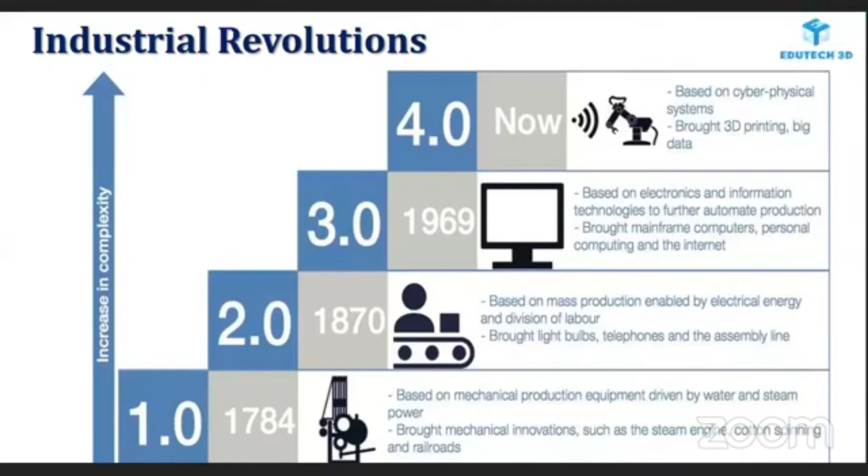The computer had been invented, and currently we are in the fourth industrial revolution. It is basically the combination of earlier inventions. The internet has lessened the distance between manufacturing systems. Robotics has been invented, the Internet of Things has been invented, along with big data analysis, augmented reality, virtual reality, and 3D printing. This kind of cyber physical system has grown up, and we are now entering the fourth industrial revolution, known as Industry Revolution 4.0.

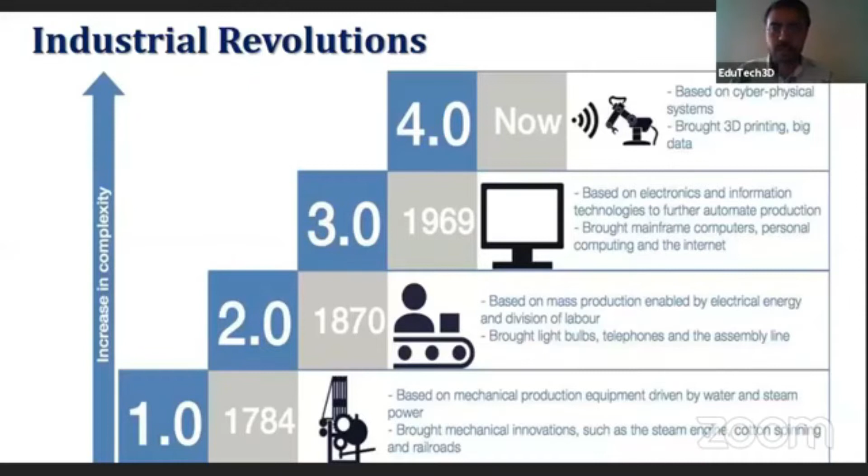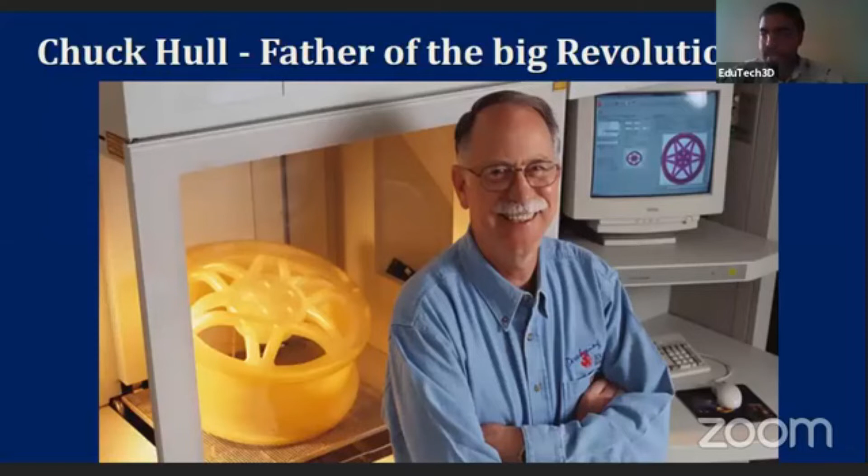Let me give you a brief introduction about what this technology is. The 3D printing process is actually a layer by layer process. You make a layer with the help of a 3D printer, and on the first layer, another layer is made. In this manner, as a mason builds a house or structure, there are 6 phases of 3D printing, starting from the 3D CAD model to the entire 3D printed object. First and foremost, we need a kind of software into which we can make our CAD model. After making that CAD model, it has to be converted into a particular file format, known as .stl file, also known as stereolithography or 3D printing file.

After making that file, your 3D printer is not able to understand what data is contained in that .stl file. So it has to be converted into a machine readable format, and what we are using to run the CNC machine is the G code file. So that .stl file needs to be converted into G code file. For that we require a kind of software which is known as slicing software.

We have discussed two softwares. First is the modeling software, another is the slicing software. Both are available as freeware, or you can purchase them. There are so many kinds of easy softwares available right now which you can use to learn 3D printing.

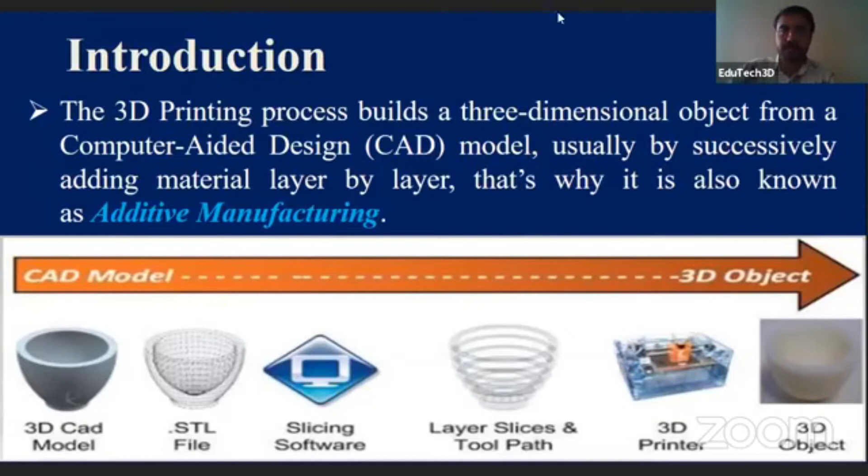After considering hardware, you have to acquire software knowledge for running a 3D printer, for modeling a certain kind of 3D model, and for converting that 3D model into machine readable format, that is G code. For this entire process, you have to consider many kinds of software. So software makes up a very good proportion of the 3D printing ecosystem.

Next comes the material. Until now, we have developed more than 100 materials of different types. For example, thermoplastics, polymers, composites, metals, alloys, rubber, elastomers. So many kinds of materials are available which can be dealt with by certain kinds of 3D printers. So we have enough material in today's era to deal with 3D printing, and new materials are being introduced day by day as material science progresses.

The fourth pillar of the 3D printing ecosystem is service providers, combining the three earlier stages - those dealing with hardware, software, and material - and they provide services related to hardware, software, material sizing, procurement of material, procurement of hardware, and development of software. All these kinds of services are provided by service providers, and they take 3D printing to the end user of the community. You can say 3D printing educationalists and 3D printing teachers are there, providing services into the 3D printing ecosystem.

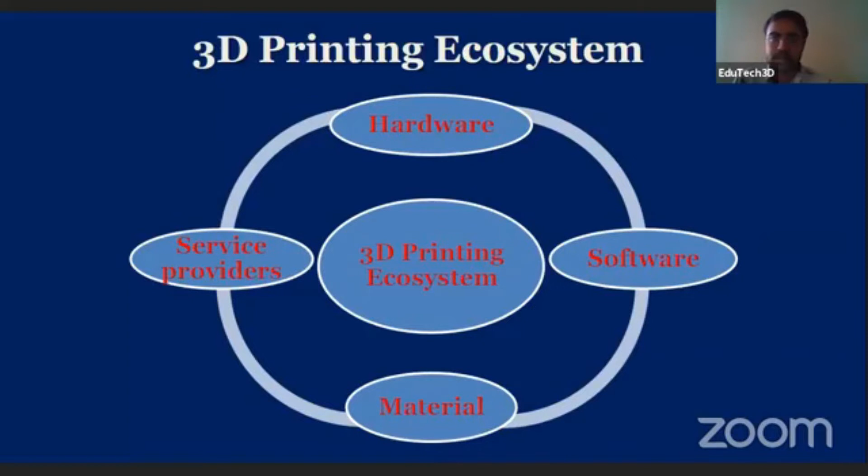Now, going into the kinds of 3D printing, or additive manufacturing technologies, there are majorly 5 types of technologies available till now, starting from vat photopolymerization, which is the earliest technology ever developed. Charles Hull even developed this technology. In vat photopolymerization, you can consider stereolithography apparatus.

Digital light processing is also there, which uses resin material and a kind of photocurable light, meaning you can use UV light, UV laser also there for curing the photopolymer material. We'll be going into the next slide in more depth.

The second process is material extrusion process, also known as fused filament fabrication, or more generally known as fused deposition modeling. But fused deposition modeling is a trademark term used by Stratasys, so in general you cannot use the fused deposition modeling name. Instead, you would consider fused filament fabrication. It's a kind of material extrusion process, meaning you are extruding material with the help of an extruder motor from the nozzle, from the hot end, and you are melting the plastic material. The material is thermoplastic - according to temperature it melts and starts flowing out of the nozzle, and it will deposit on the platform bed, generating shape according to the provided geometry. So that is material extrusion.

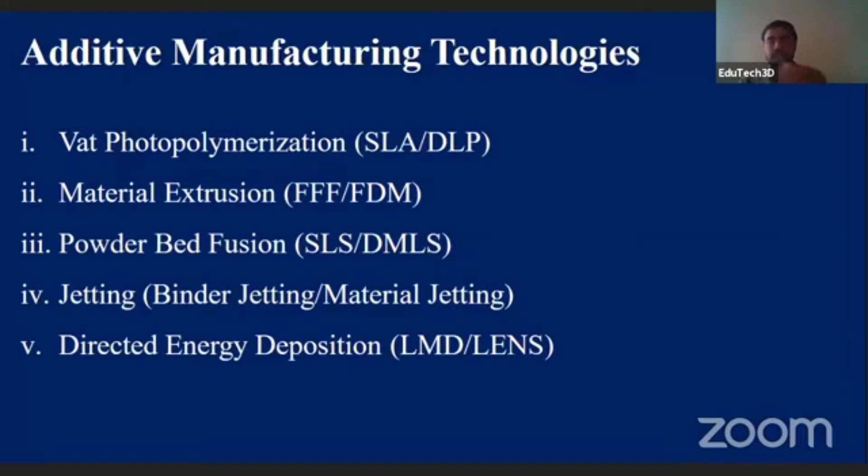The fourth process is known as jetting process, specifically binder jetting and material jetting. We'll go through the difference between binder jetting and material jetting later on. The fifth one is the directed energy deposition process, also known as laser metal deposition or laser engineered net shaping process, in which we have a coaxial nozzle for the material and the laser. One nozzle imparts the laser, and another nozzle provides the metal powder. The laser melts the metal and it starts depositing on the platform, generating the shape into the third dimension by similar means.

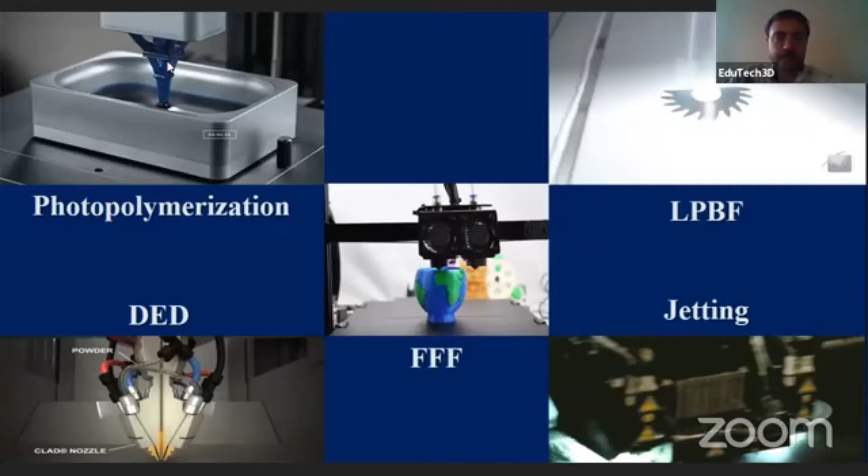Here I have shown images of various processes, starting from photopolymerization. This is a resin pool into which a photocurable resin is filled. Resins are of two types: either castable resin or non-castable resin. Your resin fuses with the help of photons, meaning UV light or UV laser. At the place where your geometry is provided, you impart the laser on the resin, and at that point the resin gets fused and starts making the shape. The platform is upside down, so in this technology you get the shape in an upside-down manner from base to top. After producing the whole object, you opt out the material, and after post-curing, the object is ready.

When to procure this kind of 3D printing system? When you require a certain kind of geometry and surface complexity, then you can opt for this kind of technology. It will give you a tremendous amount of accuracy in shape.

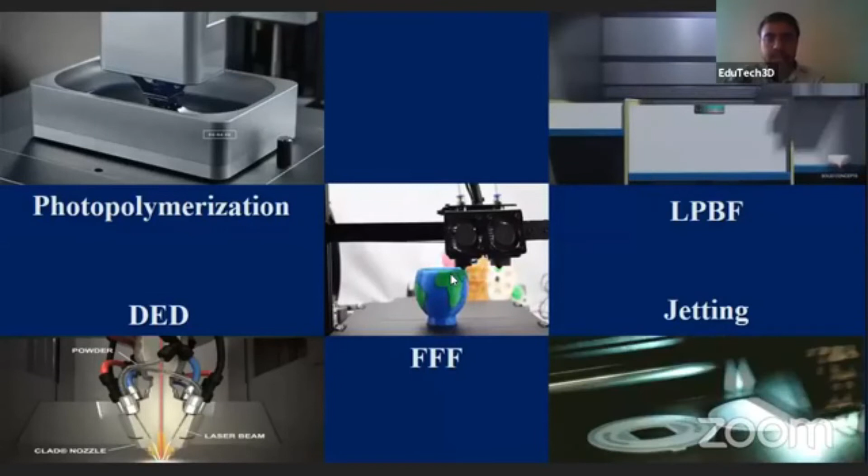Another kind of technology is fused filament fabrication, or FDM, which is a material extrusion technology. You extrude the material from the extruder, where a hot end is provided. The hot end melts the material, and it comes out of the nozzle and is imparted on the platform bed, as here a small scale replica of earth has been made. As per your geometry, you impinge the material on the platform and it gets fused there, using plastic or thermoplastic material.

The third process here is laser powder bed fusion technique, in which we use laser power to sinter or melt material. There are two processes: some machines are able to sinter only, and some are able to melt the entire material. If we are dealing with plastic or polymer, you are not going to melt that polymer powder; instead you only have to sinter it, and it gets fused with some kind of binding mechanism, generating your material.

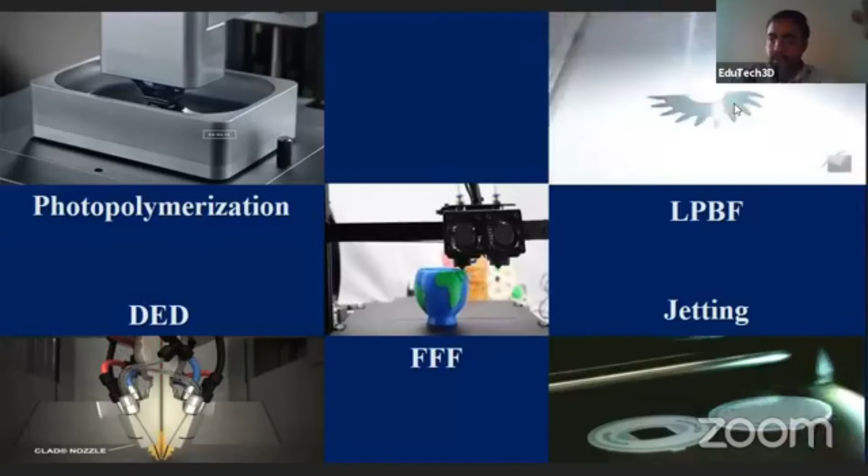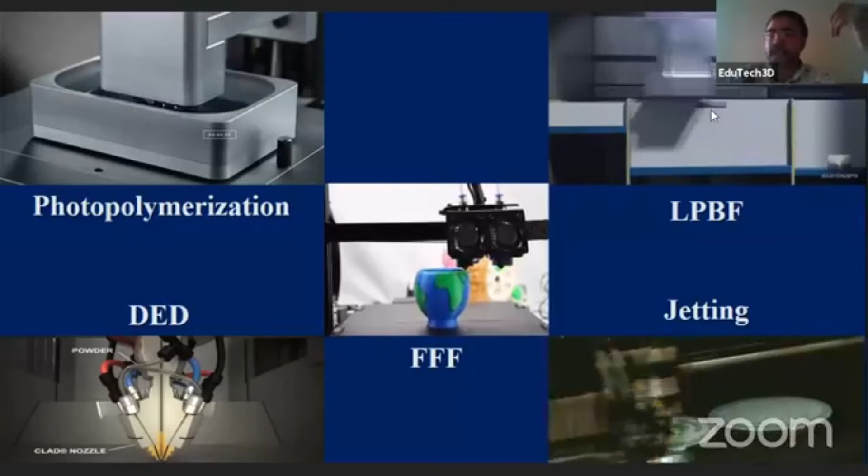If you are using metal powder, then in DMLS you are sintering the metal powder, not melting it. But if you are using selective laser melting, then for metal particles you need more laser power, a more efficient, higher voltage laser, which melts the metal powder and fuses it with other particles. Certain kinds of alloys are also used in this laser powder bed technology.

Next comes the jetting technology, into which there are two processes: binder jetting and material jetting. It is similar to inkjet printing. In binder jetting, we have a powder bed similar to laser powder bed fusion technology.

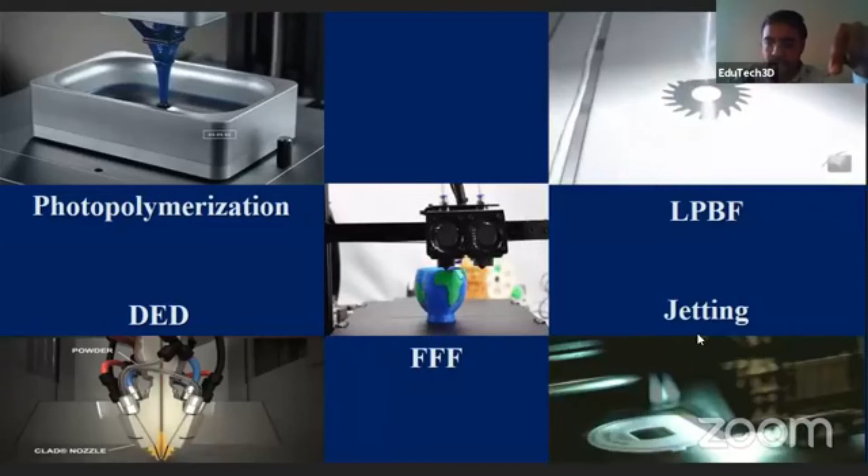In material jetting, this is similar to the stereolithography process. There will be a number of tiny nozzles that impinge the droplet, as is done in a 2D inkjet printer. In a 2D inkjet printer, we provide ink powder. Instead, here in the jetting process, we provide metal powder or polymer powder, and it will be impinged over the build platform. A laser or UV light on the printhead will cure the material deposited over the bed, and it will start getting fused over there, generating the shape.

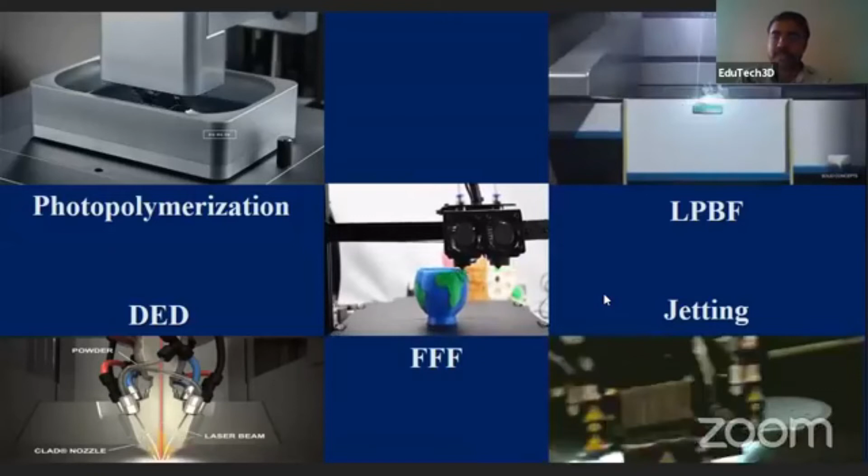Certain kinds of color jet process or polyjet processes can make things in monochromatic color or multicolor. You might have seen certain figurines or small scale replicas of humans, as well as statues. They are all made by the color jet process.

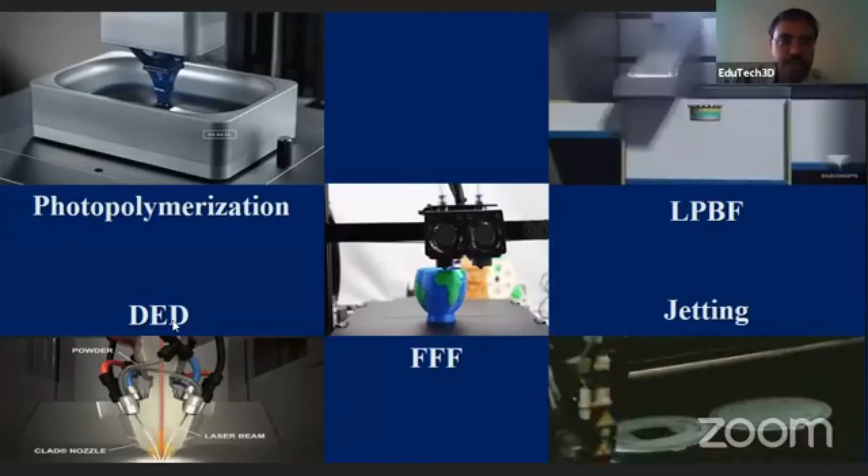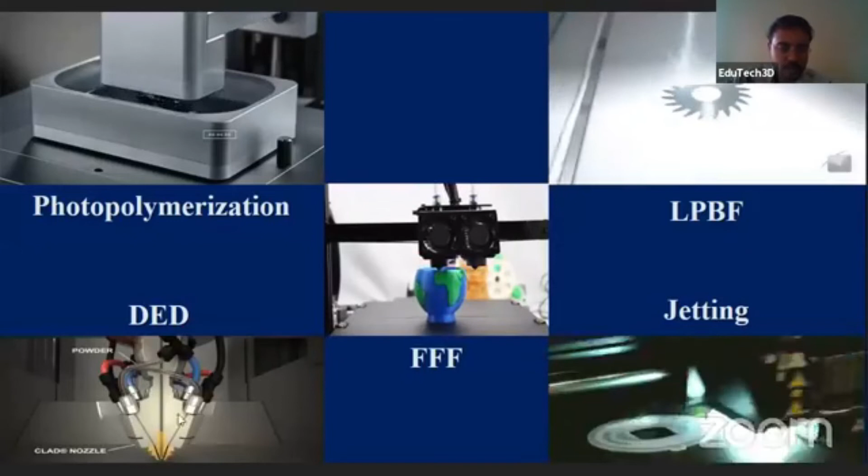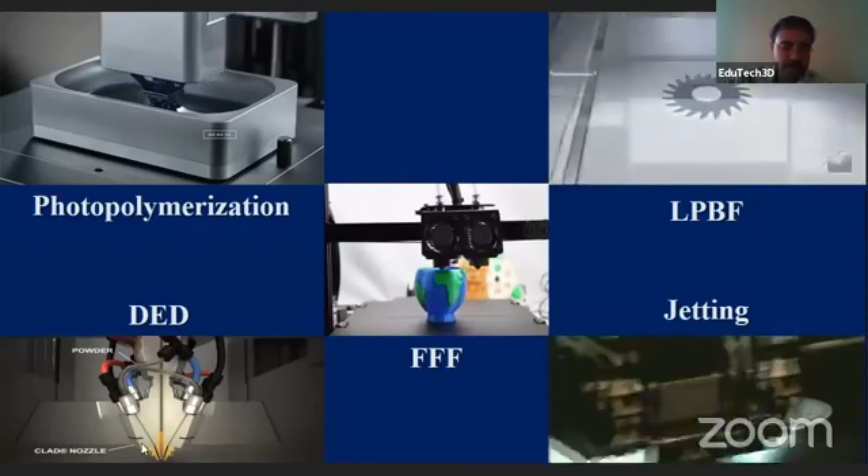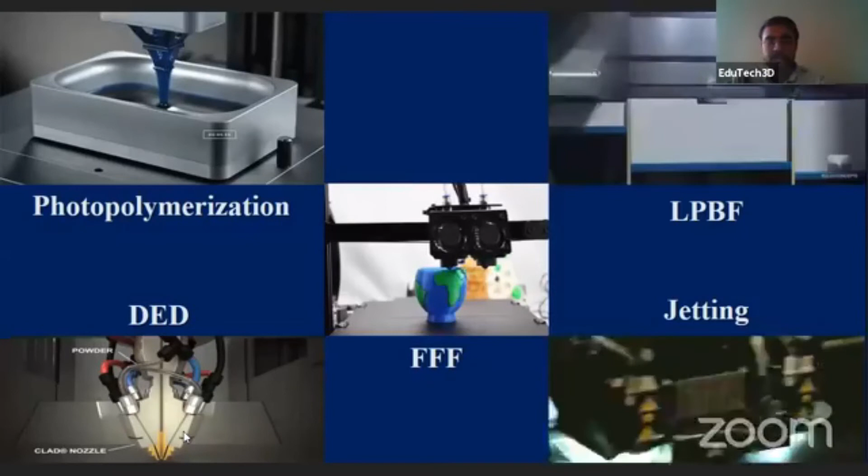The last process is directed energy deposition, also known as laser metal deposition, or the LENS process. LENS is a trademark process of a company, in which there may be a number of coaxial nozzles, as you can see in this figure. The laser is imparted from here and material comes out of here, and it starts melting on the build plate at the same time, and your 3D print starts in the same manner. So these are the processes of 3D printing, and various replicas or new inventions are being done in the field.

So with respect to our topic, 3D printing is a game changer in the manufacturing scenario. How is it able to make this kind of big change? Let us start discussing that.

But in additive manufacturing, this is not the case. All you would need is a system compatible with 3D printing. Your computer is there, you make the 3D model in your computer only, and with the help of the World Wide Web, the internet, you distribute that file which has to be 3D printed to the end user. Yes, a concept named distributed manufacturing can be implemented in additive manufacturing.

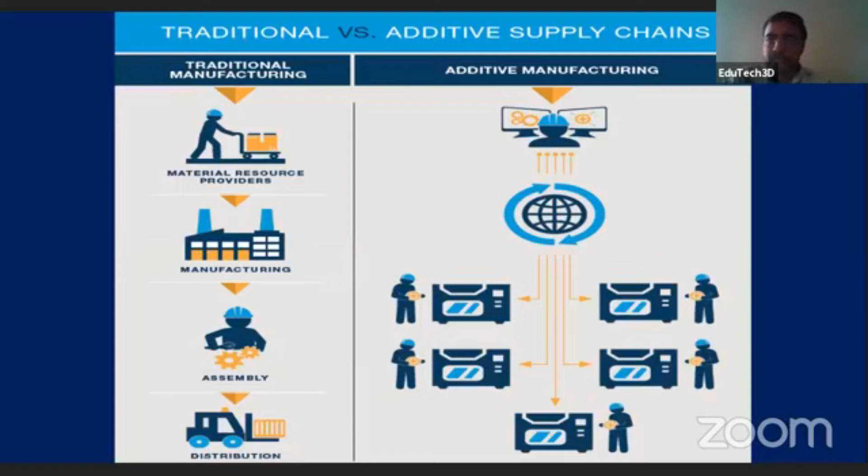As we have all faced the lockdown situation, since before the lockdown started, no one had heard about 3D printed face shields. But as the requirement started in Europe, there was the invention of face shield visors and strips. From there, they open sourced the files, and across the entire world, in 1 or 2 days, 3D manufacturers received that file, downloaded it, and started making 3D printed face shields on their own. You cannot even think of this with traditional manufacturing, because everything was closed at the time of lockdown. So this is the power of additive manufacturing, this is the power of distributed manufacturing, we can say.

I would like to mention that additive manufacturing is not going to replace the entire traditional manufacturing. It is the option for this limitation of conventional manufacturing, and it is not going to change the entire manufacturing scenario.

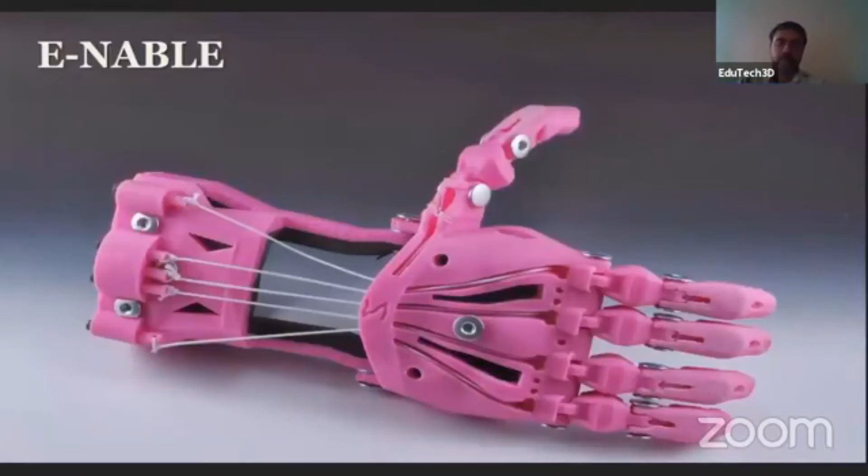For example, here is a case study of a 3D printed prosthetic hand. You might have heard about the E-NABLE organization, which provides 3D printed customized prosthetic hands to disabled people, whether disabled from birth or afterwards. For example, a small kid who is growing up will continuously grow, so as his hand grows he would require a prosthetic hand as per his age. It is not possible to make a new prosthetic hand by conventional manufacturing at a reasonable cost - it would cost him a huge amount. But if we opt for 3D printing instead, it will be cheaper.

Another case study of customized items was used in the Kesari film, which you might have seen. Akshay Kumar wears a turban on which a badge is there indicating 36-6. This badge was entirely 3D printed. So this is the kind of customization which can be done by 3D printing.

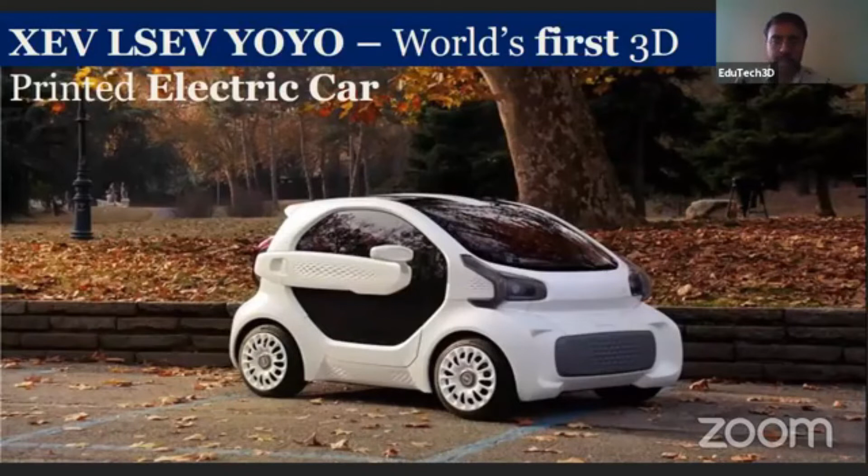Two weeks ago, Dr. Subhas organized a webinar with Mr. Varmora and discussed electric vehicle opportunities, since it is a growing market. Today, Dr. Subhas has organized this 3D printing seminar. So what if we combine both concepts? This is the best example of 3D printing and electric vehicles.

This is a car developed by the Italian startup XEV, named LSEV Yoyo - low speed electric vehicle, and its name is Yoyo. It is claimed to be the world's first 3D printed electric car, entirely 3D printed, which can run at 70 km/h speed and go for 150 kilometers. The producer claims they have reduced the car components from 2000 to 57 due to 3D printing. This is the power of mass customization - for an entire mass of people requiring a budget car and a novel car, they can have it with the help of 3D printing.

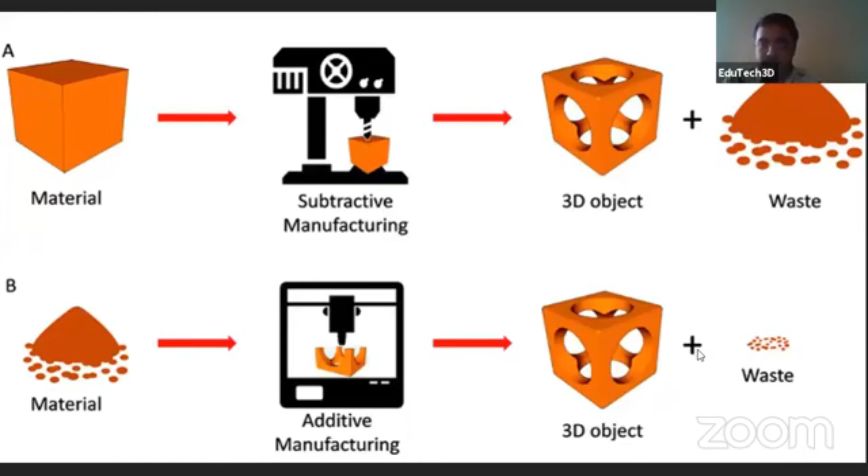Similarly, you don't need this kind of inventory of raw material or finished product, because as and when the requirement comes, you would have the material, you would have the 3D printer itself, start 3D printing and dispatch the material as per requirement. So these can all be eliminated by implementing 3D printing in conventional manufacturing.

In new product development, we are using 3D printing as well. As per one study, more than 50% of new product development companies have moved to 3D printing, because it has enabled them to reduce cost by up to 90%. 80 to 90% of cost has been reduced by implementing 3D printing technology in new product development, because they require a number of iterations for idea generation. That's why they have opted for 3D printing.

The best example of it: we have this kind of face shield visor, and before going into market, we initially experimented with 3D printing. We made 3D printed face shields because we had the design open sourced, and we converted it into a G-code file and printed it.

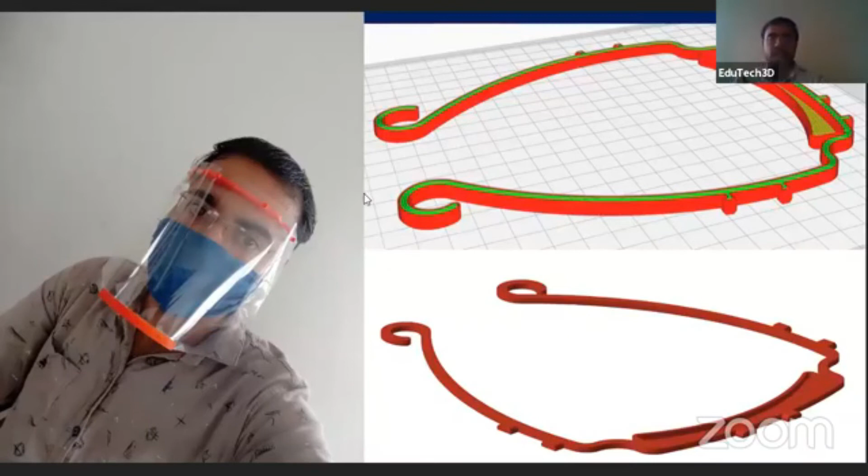After succeeding with this product, now we are injection molding it and producing in a mass manner, meaning 10,000 pieces, 20,000 pieces at a time. If we want to produce, then we can opt for injection molding. So this is the best example of new product development. Let us discuss mass manufacturing with 3D printing.

You might have heard about hearing aids, and as per the study, almost 95% of hearing aids or hearing implants across the world are made with the help of 3D printing. The technologies for producing the hearing aids are stereolithography and DLP. These resin-based technologies are able to produce hearing aids in mass numbers as per customer needs.

Because the hearing aid companies are scanning the ear of the customer, and as per the requirement, they are producing the hearing aids. A very well-known company in this field, Starkey, has claimed to make 98% of its hearing aids by 3D printing.

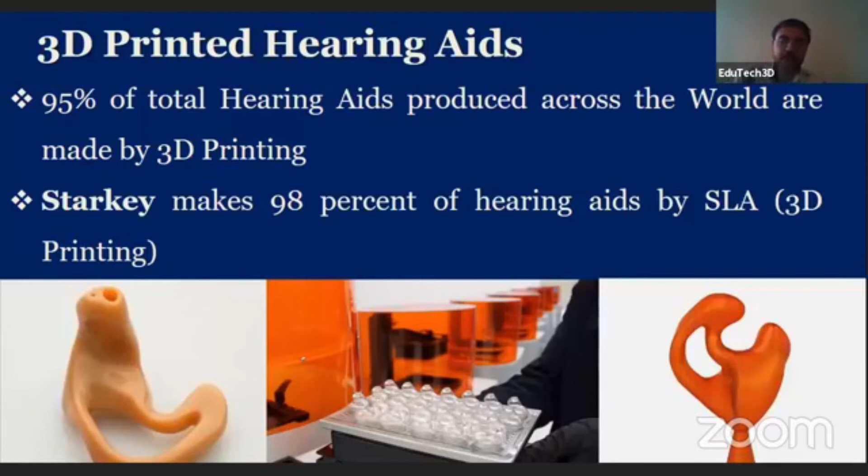This is also a very familiar case study. You might all have known about this. This is the invention made 2 months ago in Italy. Italian startup Isinnova has done this. In Brescia, there was an immediate need for ventilator valves due to the increase of corona patients in the hospital, and conventional manufacturers weren't able to cope with the demand.

So Isinnova collaborated with local manufacturing unit Lonati, reverse engineered the ventilator valves and started making those valves with the help of 3D printing, the SLS printer and the FDM printers. And within 24 hours, they were able to make more than 100 pieces of the valves, and they gave them to the hospitals.

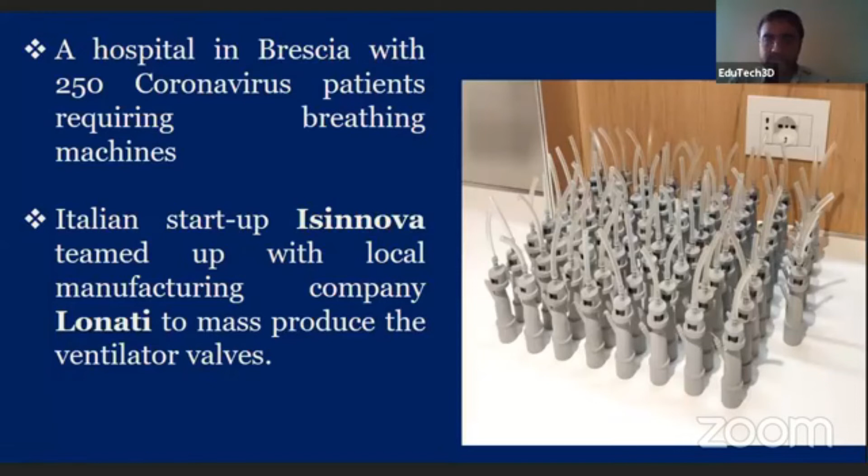Automobile manufacturer Volkswagen has over 125 industrial printers. So what they did, they have collaborated with more than 25 other companies. They have started making personal protective equipment for the medical community with the help of 3D printing. Another tech giant, HP, is employing 3D printing expertise by turning its R&D centers in Spain and the US into factories manufacturing urgent personal protective equipment.

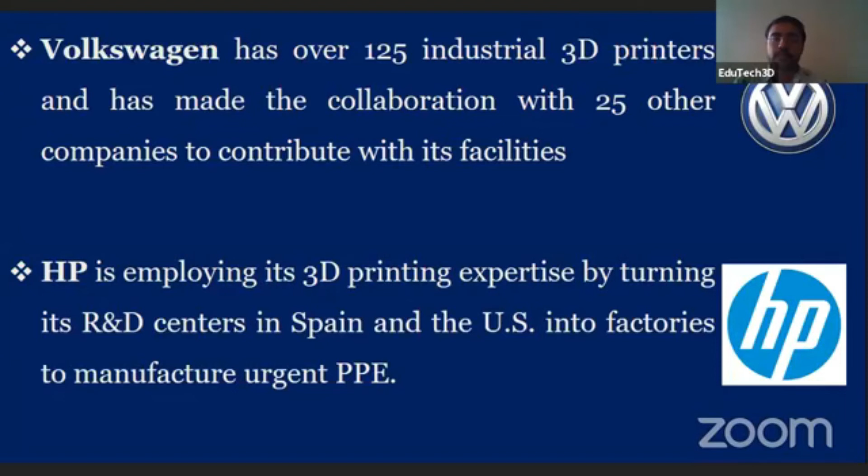Formlabs is able to provide more than 75,000 to 150,000 nasal swabs per day. That is a huge capacity. This is the best example of mass customization and mass production with the help of 3D printing. Some bigger companies have dedicated their entire farm for the production of personal protective equipment in the time of COVID-19. The 3D printed farms for the masses.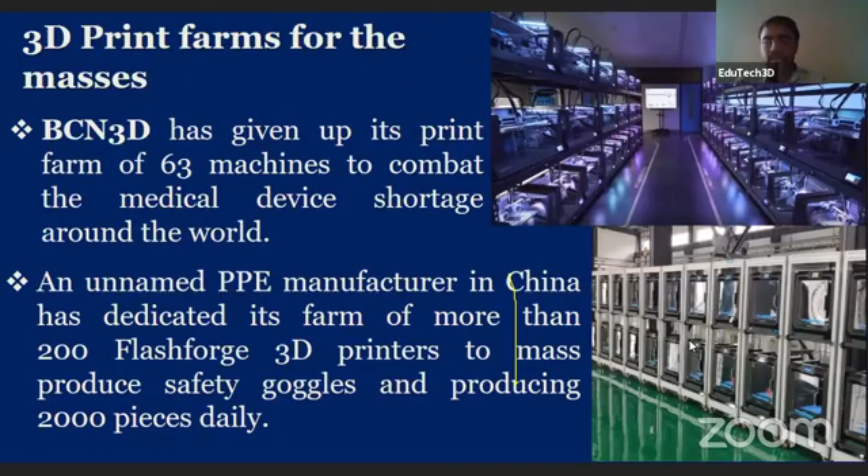In the same manner, an unnamed company in China has dedicated its farm of 200 Flashforge 3D printers for the production of 3D printed goggles, and they are producing and distributing them across China and outside China. Next, as you can see in this figure, China has developed an entire 3D printed cabin. You can say the 3D printed quarantine room.

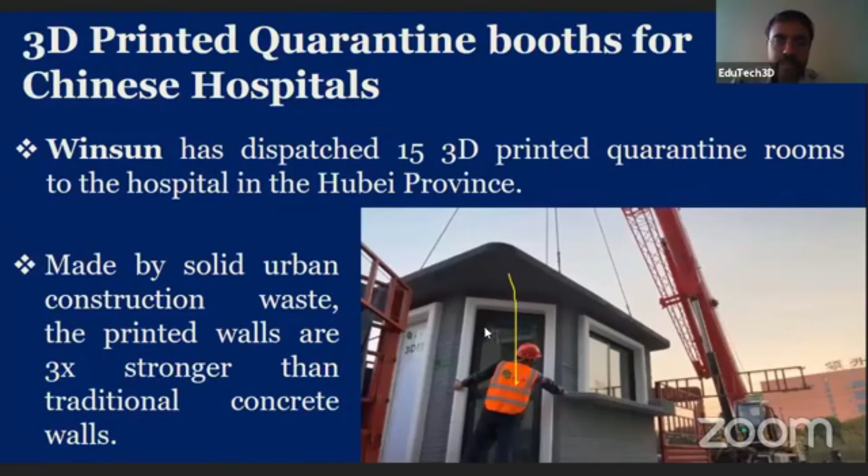You might have heard the news that China developed a hospital in 6 days. So in that construction, they introduced 3D printing. A company named Winsun has dispatched 15 3D printed quarantine rooms to hospitals in Hubei province, from which the coronavirus started spreading. And they have made this whole structure from urban construction waste. They are claiming that these printed walls are 3 times stronger than traditional concrete walls.

Now, we are also facing some challenges in 3D printing. For example, the cost of the equipment is very high. FDM 3D printers are reasonably priced. But metal 3D printers come in lakhs of rupees or even crores. So that cost has to be brought down for normal people and normal applications. Second is the material available for the industry. We currently have more than 100 materials, but we would require more types of material for each and every industry.

Third is post-processing, because in some cases, for example the powder bed fusion technique, we have to vacuum out all the powder and post-process the printed object. In fused deposition modeling, we need to remove the support structures and all that. So for that, post-processing is required. Next is the manufacturing cost. As the material is costlier and the printer is costlier, manufacturing cost is higher. So it has to be lower.

Next is expertise, because we need qualified, trained manpower to operate the 3D printers and deal with the software and all that. So for that, as we mentioned earlier in the employment slide, we need certain skills for the 3D printing industry. If we don't have that skill, we need to acquire it, otherwise we will be thrown out.

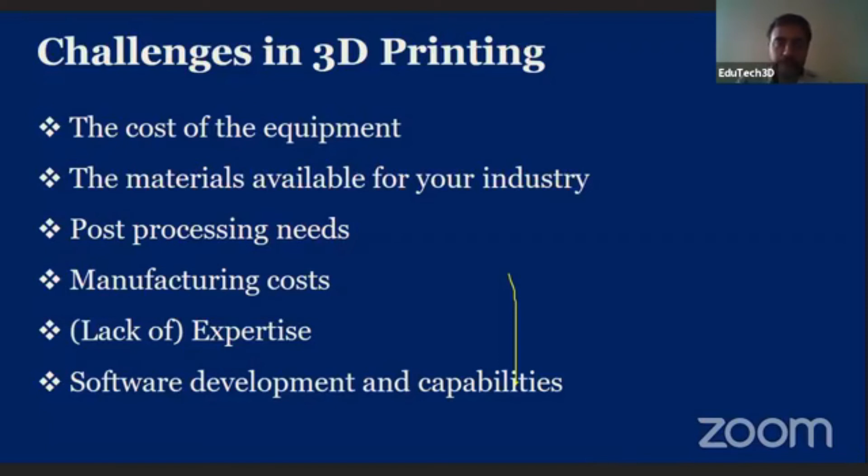So this is a challenge also to make this kind of software. According to me, the current situation is the best, and can be considered a turning point for us in the 3D printing sector, because in Asia currently only China has a proportion of nearly 50% of the 3D printing equipment in the 3D printing industry. Second comes Japan, which is contributing 30 to 32% of the overall market in Asia.

And if we talk about India, the contribution of the Indian 3D printing industry is nearly 3 to 5%. So there is a huge scope. We can consider it as a scope for evolvement. We can evolve, we can develop more and more new technology to compete with other countries, and to develop more economical, feasible, and easily available 3D printing technologies. So according to me, the full potential of 3D printing is yet to be seen in India, and there is a huge scope in development of this sector and the development of new products.

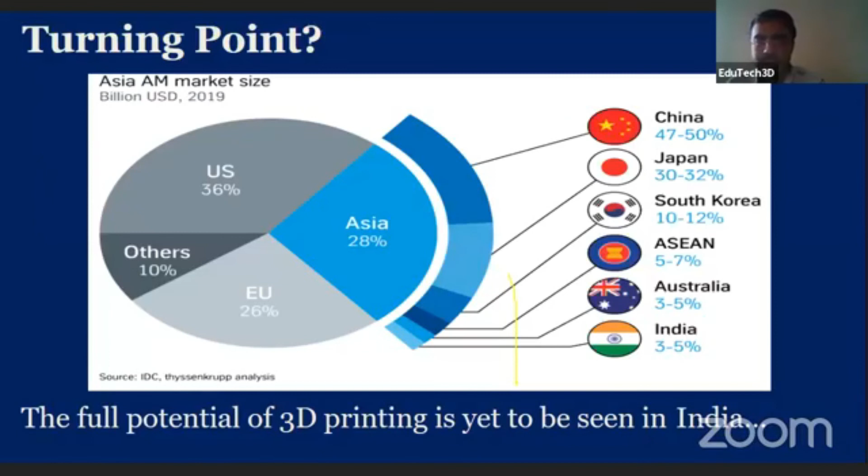So it is best to invest our time and our money in this technology for development and dissemination. If not today, then tomorrow we'll have to adopt this technology. So why not today? So let's start getting more and more insights in 3D printing, and develop in this sector.

The last topic I would like to share with you is the future technology known as 4D printing. It is 3D printing, but a new parameter has to be considered in this, which makes the fourth dimension. You can say it's the external stimulus you have to provide on the 3D printed object, so that it can convert into the required shape for any kind of operation.

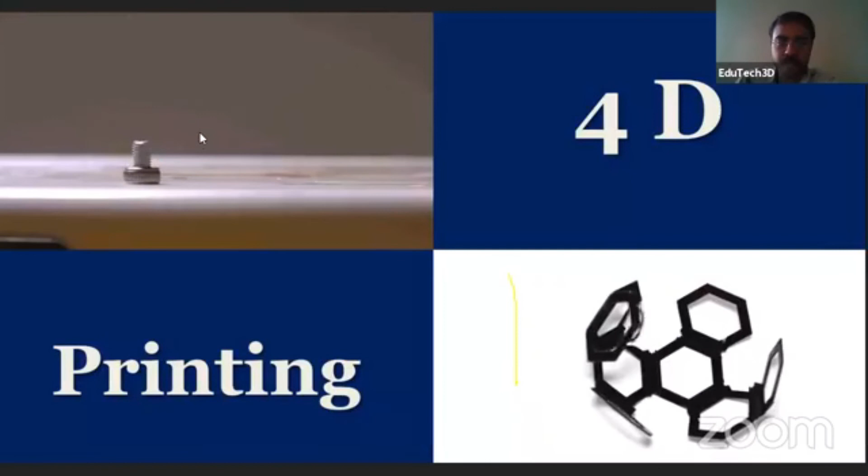For example, as you can see over here, there is a grabber to grab the nut, but it is 3D printed, and as per the requirement, when you are pushing out the material from above, it will grab the nut, and that can make a kind of movable thing. In the second figure, if you want to print a sphere, then you would need a certain kind of support to be provided over here.

But instead, if you are printing this kind of material, after stimulating, meaning putting it into water or giving some kind of external stimulus, it can change its shape. So it is easily converted into a sphere-like shape. So this is the power of 4D printing. This is yet to be explored more by researchers. It is in the developing stage. Some bigger universities like MIT and Stanford are working on this 4D printing technology.

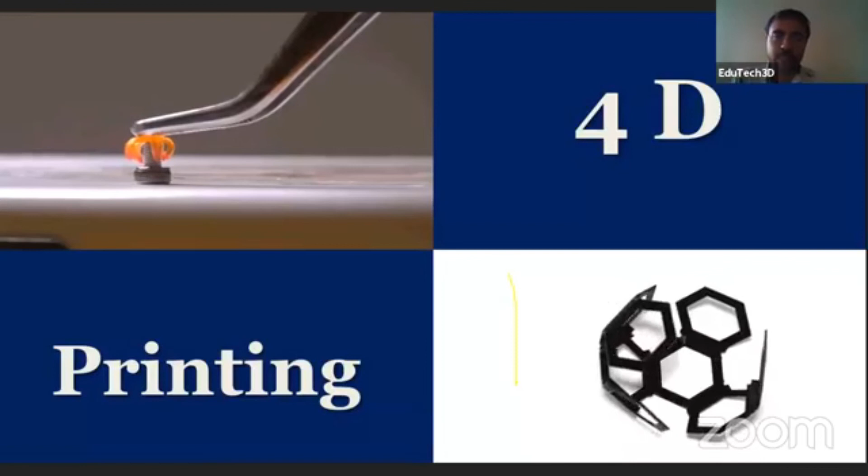And you might have seen a kind of material known as nitinol, which is an alloy of Ni and Ti. It is also this kind of material having this property. As you impart the external stimulus, it starts altering its shape. So it is also a new manufacturing sector.

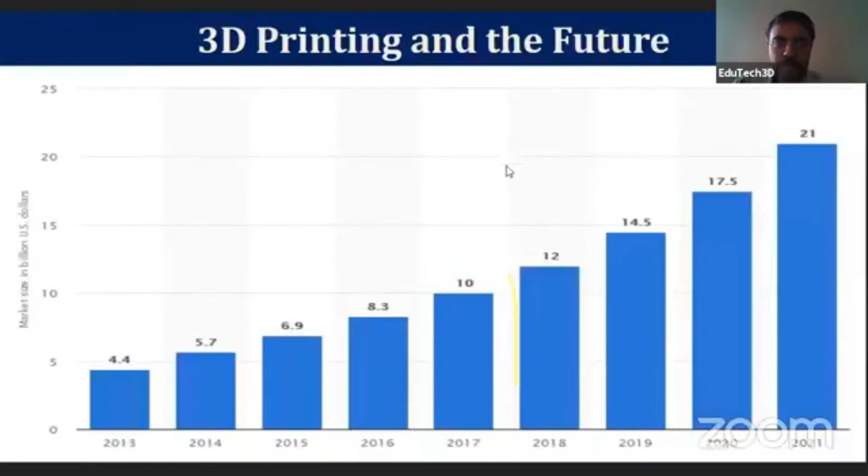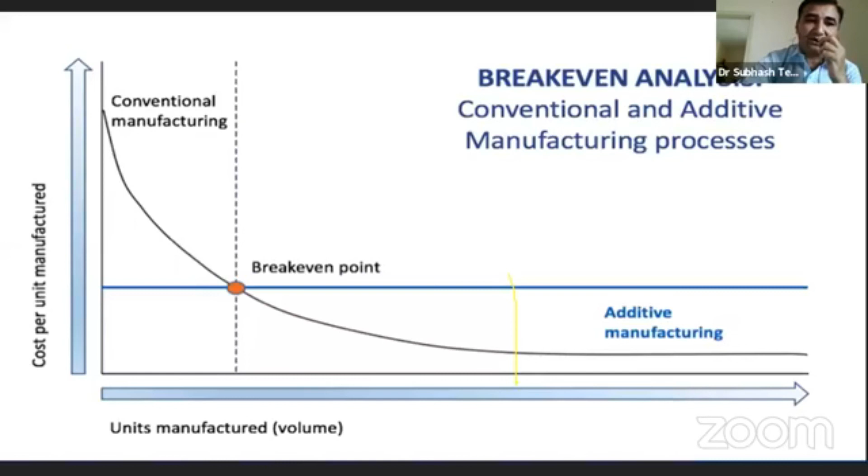Mr. Raj, one more question from the chat box. From the strength point of view, for the same material, which process is better, conventional process or 3D printing? Yes, I have discussed a case study over here about the airplane. Now, what if 3D printing does not have the strength compared to traditional manufacturing?

They won't go for this. That means you are having the strength as much as you can get in traditional manufacturing. There is nothing different between them. The material used is the same. In conventional manufacturing you are using the blank; instead, in rapid prototyping in 3D printing, you are using the metal powder of the same material. So there will not be any strength comparison between these two.

Okay, one more question: which software is used in 3D printing? Sir, as I mentioned, there is one kind of software known as modeling software for modeling the 3D object, and another kind known as slicing software to convert the .stl file to a machine readable file, that is G-code. So for example, softwares like SketchUp, AutoCAD, CATIA, ProE, SolidWorks are used in modeling the 3D models, and softwares like Cura and Simplify3D are used in making G-code files from the .stl file.

Hello Raj sir. Yes sir. What about environment and health problems? It is, I can say, material dependent. For example, in material extrusion, if you are using PLA material, then it is not harmful for the environment or for human beings. But if you are using ABS, which is a petroleum based product, it has to be made in a separate chamber with a well ventilated room, because it harms the human body.